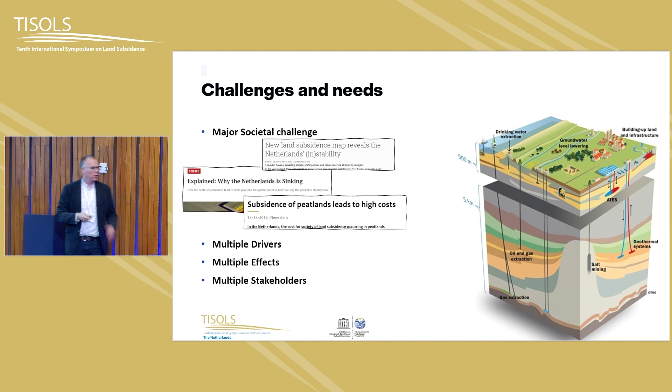And what we typically see in our country is that if you go anywhere in the Netherlands, most likely there are more drivers that relate to subsidence. And one of the issues is then how can we, on the forefront, predict what the effects could be on buildings and infrastructure, on the built environment.

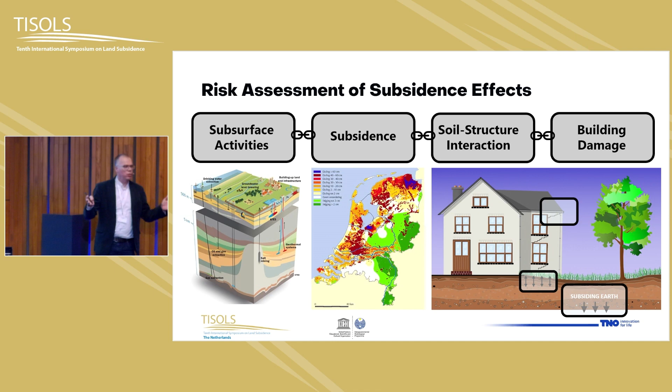We are tackling this issue by aiming to build what we call a chain of models, or model chain, where we go from left to right. So we want to identify for any subsurface activity how this causes subsidence, but how that subsidence then, through soil structure interaction, in the end leads to building damage. So we go from relatively large scales, step by step, to the building scale.

We have a number of particular issues that we really would like to address in our work. And the first one is about this disentanglement of the subsidence drivers. So we have different subsidence drivers, but what is the contribution of each of them in the end to this damage? We want to get a hold on that.

What's also relevant is that if you look into predictions of subsidence, particularly in this case for the Netherlands, they are typically on a certain grid, like 100 by 100 meters, which is far from the scales which are of interest if you want to look into buildings. So we have to look how we can go from those scales towards what we need to say something about buildings, to go to the building scale.

Then, of course, the issue is when there's a building on top and you have subsidence, the building itself also has a lot of influence on the behavior of the soil directly underneath. So there's an interaction there. So we want to take a look into that one.

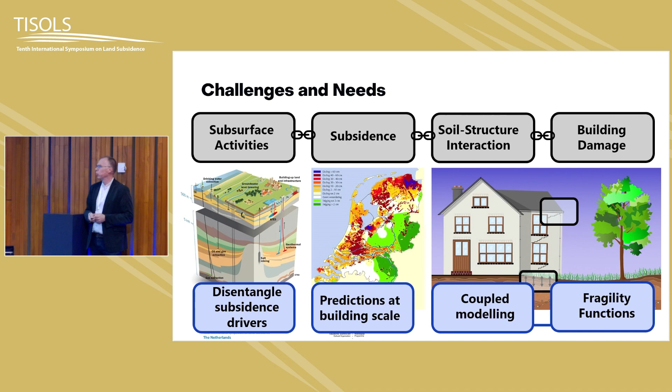And in the end, we work with the concept of fragility functions, which is well known in seismic engineering, well developed there. Because in the end, we want to say something risk-based, so probability-based. So then the concept of fragility function seems to be a rather straightforward way to apply. And I want to say some words about all those four topics, and of course also refer to other talks and posters in this conference.

Because if you look into disentanglement of subsidence drivers, some studies are underway. One of the studies actually is going to be presented this afternoon by Manon Verberne. She's in the audience here. She's already getting a bit nervous for the talk, but you're all welcome to hear her.

And she builds more or less on what has been published before by colleagues of mine in this paper, which was published last year, where, if you look into these figures, you see in this case 3 different human interventions, and 3 different subsidence contributions illustrated here. I'm not going into details, but if you go to the right, you can see that if you have 3 different subsidence effects, you can, in fact, add them up to come to the overall subsidence.

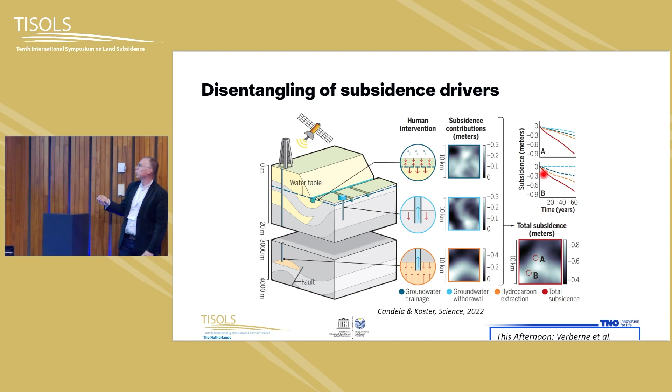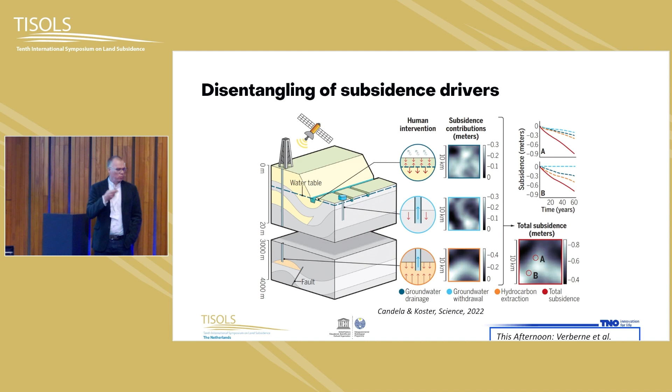What we typically see if you have observations, we only have this red line. So we want to know how to disentangle those contributions. So let's leave it at this. You can hear more this afternoon.

The second part is about this downscaling, which is an interesting one, because if you do predictions on a regional scale on this larger grid, how can you then go to these smaller building scales? How can you do that? Well, in this case, for the Netherlands, we have the Geological Survey of the Netherlands in-house, and there also, besides the geological information, there's also information based on CPTs in-house.

So it's strange. I'm pointing that direction. It's over there.

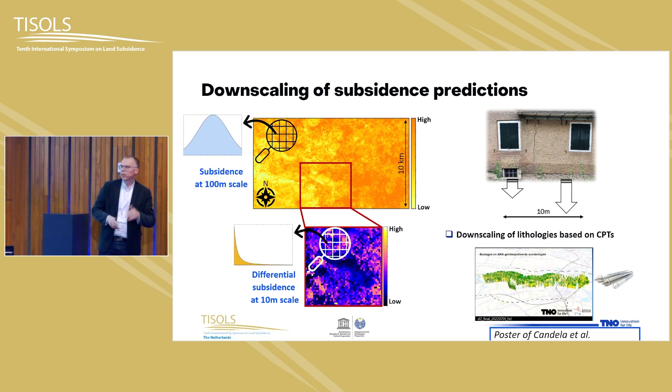And we use that information, which we have in-house, to predict more or less in a probabilistic way how the surface behavior on the smaller scales is. It's really work in progress, so I hope that in the next conferences more of that will be presented. You can also talk with Thibault Candela, who has a poster on this topic in the room where the posters are.

And then my field of play comes in. Then we want to look into what's happening with damage. And to start with that, I like to use these very, very simple representations, because what you typically see, if you have a subsiding region, what happens to houses? They are sinking, obviously. We all know that, because the surface moves and the buildings move with it. But some of them won't, because some of them might be on piles.

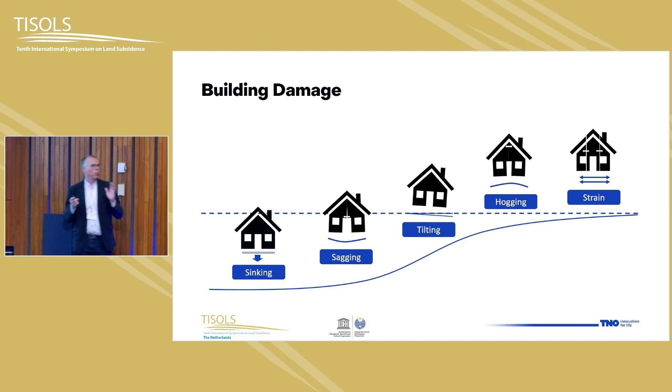I think Gilles showed some pictures of that. You can even have differences there. But if you look to individual buildings, that's what's happening. They can sink, they can sag, they can hog, they can be a little bit torn apart, very, very little, and of course they can tilt. Most likely when you have local effects, it's a combination of these things. And what we typically see is that sagging and hogging seem to be the most dominant parameters that cause damage.

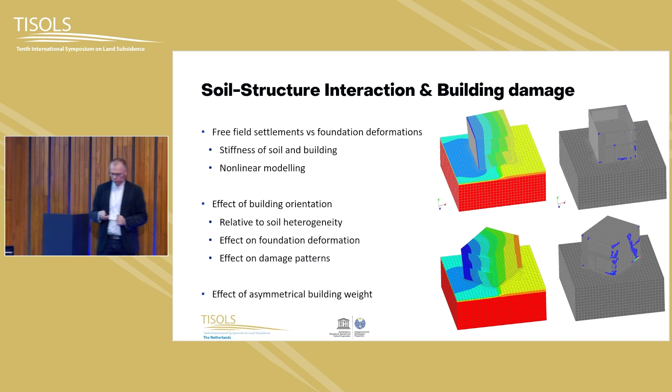And of course, a third item not in the plots is that we also have to look into the building weight and especially the distribution of the building weight over the building, how that works in the end for the damage indicators. And the fourth item is the development of fragility functions.

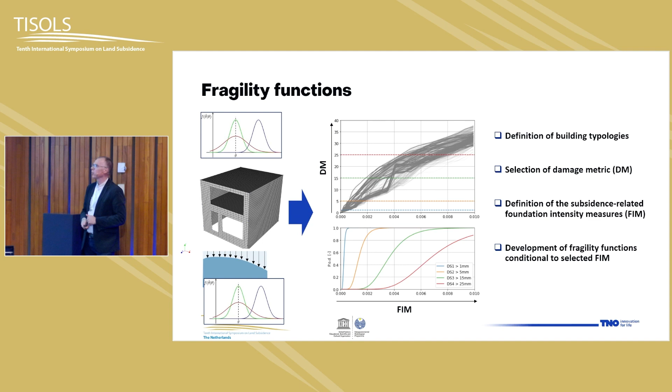Maybe a rather complicated figure, but at the bottom left is a representation where we say, okay, you have a certain movement of the subsurface, but that movement is described in probabilistic terms because we don't know exactly, but we know a bit about the stochastics, the statistics behind it. And on the upper left side, it's basically the same for the properties of the building and the materials of the building. So we have to put that information inside models.

And we do a lot of nonlinear calculations so that we actually calculate cracks inside buildings and propagation of cracks inside buildings. And then you can draw curves like this, where we have what we call an intensity measure for the foundation movement versus a measure for the damage. In this case, it's crack width, but we are still investigating whether that's an appropriate one, because there are more around, we know that. We're also working here with the people from TU Delft.

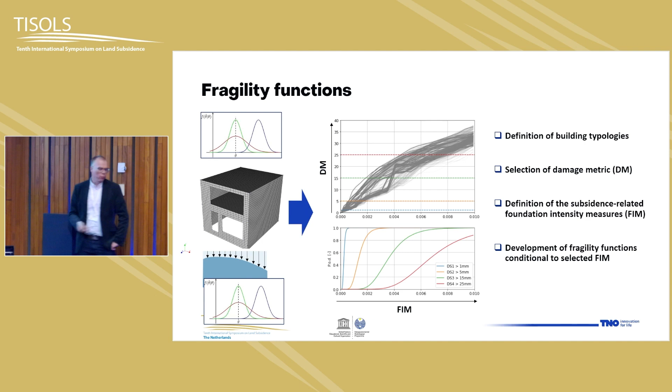We have a PhD student just started in this field, so that would be one of the topics that she will dive into. And here we have fragility functions, as we know them also in seismic engineering, where we have an intensity measure versus, in this case, the probability of damage related, in this case, to a width of a crack.

So if we have that, and if we have that for not only a single model, but for a variety of models, and we link that to definitions, which is on the upper line, definition of building typologies, then we can have probability distributions per building typology of damage, and then we can link that to the surface movement predictions, and hopefully in the end come with reliable predictions of the damage.

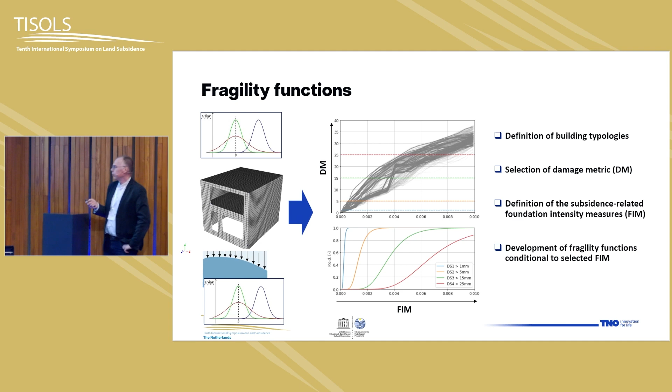I have to go to the next slide.

So one important point, of course, is that since we are using models, and you can go anywhere with models if you start to vary, we also like to validate or calibrate our models with a lot of data. Some techniques are listed here. It's not exhaustive. We are still working to see if we can actually monitor one or two sites where we can check whether our models actually work. There's again a poster of that presented by Zhai, also somewhere in the room.

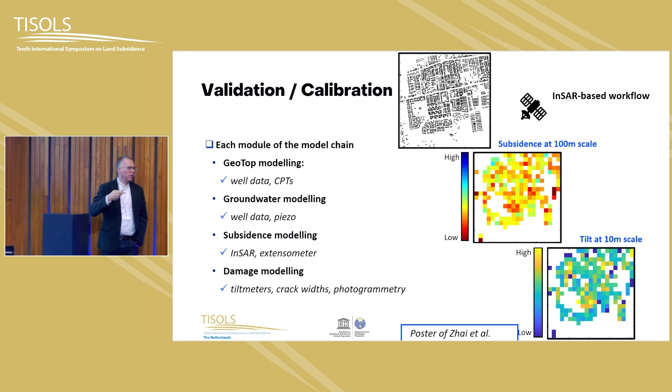So we look into InSAR data. Lots of observations have been presented here, but we also look into groundwater data as well as actual damage metrics on buildings.

Some word about the applications. Sorry, 3 minutes. Yeah, I have 2 slides left.

So about the applications, we think that first of all, this could be really of help when we want to make plans for new subsurface activities. So not only deep, but also shallow. We have a lot of plans for geothermal activities, for instance, in the Netherlands, and those questions are already on the table. So we think that if we can predict those risks well, that really would help in taking these well-informed decisions.

The second part is when we have damage already occurring. There's a lot of debate whether that occurs due to reason A, B, or C, and apparently if there's one governmental party, most of the attention goes to the government. But it's also really good to know what the contribution to the actual damage could be based on other drivers. So that would be a second application.

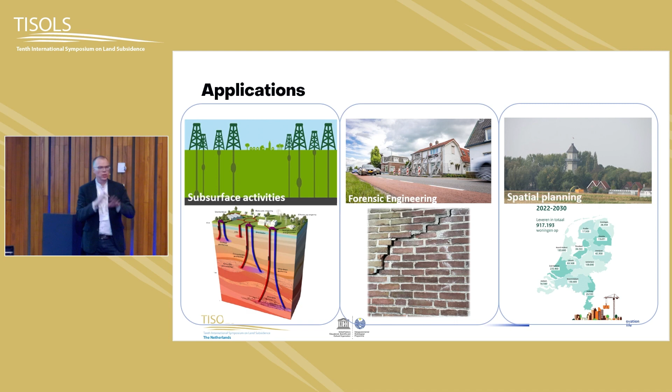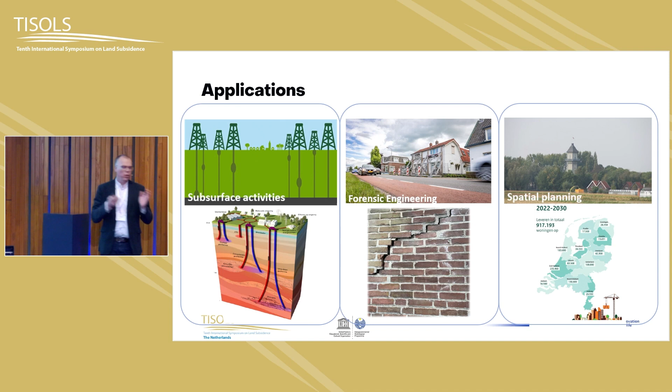And the third one is a nice debate which is going on in the Netherlands about spatial planning. We have ambitions until 2030 to build almost 1 million new houses in the Netherlands. And apart from all kinds of processes that hinder that tempo, we also need to check whether the regions that are vulnerable to subsidence are fit for purpose if you look into this effect. So not only related to flood risk, but also the local infrastructure and what it does with houses, etc., should be addressed there.

And some concluding remarks. As I said, we like to go towards a risk model. We think there's really a need for that. It's all in probabilistic terms, so in the end you cannot know specifically for your own house exactly where the damage comes from, but it's a helpful tool to say, okay, we have a certain probability that this damage will occur due to this driver.

We want to implement it in a model chain, but we have identified quite some challenges. We are going to work on it, and we are studying this. For us, we have an end term in 3 years from now, but we are quite sure that at that time we are not finished at all. So that concludes my presentation.

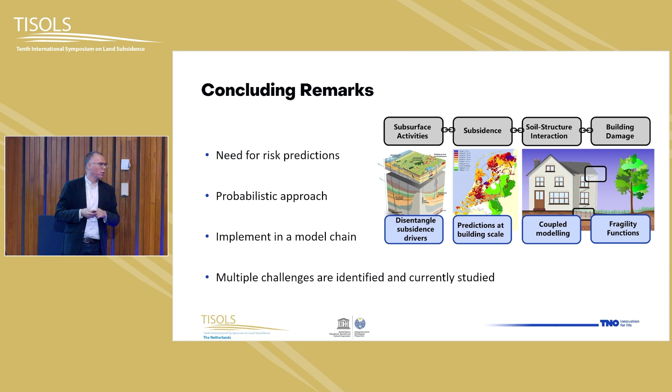Thank you for this very nice presentation.

I have one question about the damage modeling. How do you do that damage modeling? You mean in the models that I showed? We are now using a lot of FEM modeling, so we do nonlinear calculations, so that we estimate where damage will occur due to a certain distribution of the subsurface movement. And when it occurs, we also want to look into how the crack propagates to the building.

Is that what you...? What kind of mathematical model or numerical model do you use? I cannot answer that because, you know, we're using those finite element models. I don't know if you know it, the Diana FEM model is the one that we are actually applying here. Okay, thank you.